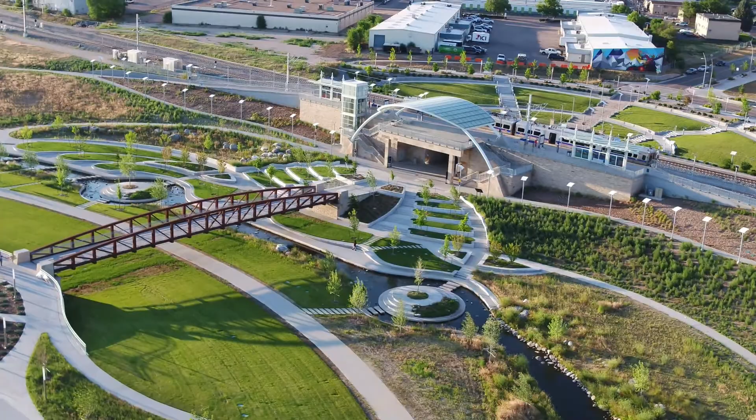Hi, I'm Dave Skuodas, Watershed Manager at the Mile High Flood District. I'm going to talk about a system of open channels we built back in 2016 in the boundary area between Louisville and Lafayette. Here are some photos, courtesy of Dave Krickbaum and Olsson, of this lovely area. There were some lessons learned on this project that I will be sharing with you today.

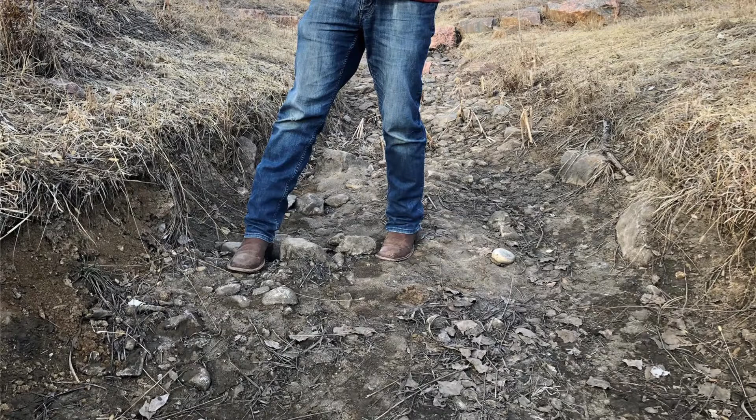There will be two fairly distinct halves to this presentation. In the first half, I'm going to talk about some stream instability we've experienced since the project was built. I'll explain what went wrong with some parts of the channel and why we think that is.

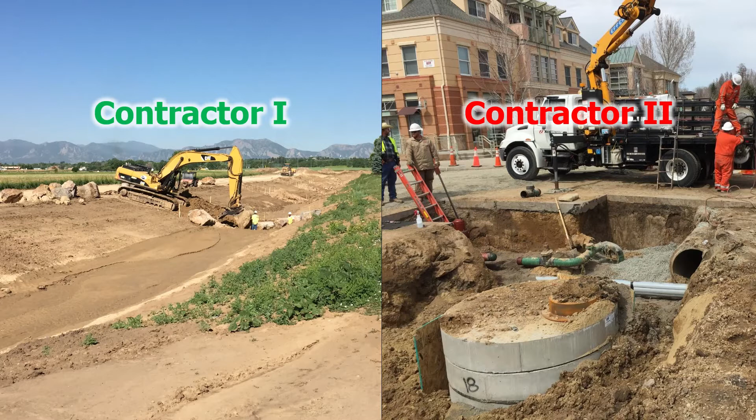In the second half of the presentation, I'm going to share some hard lessons we learned during the unique contractor experience we had. We built the project in two phases with two different contractors, giving us the unique opportunity to compare two low-bid contractors side by side on the same project simultaneously. We documented that experience like an academic exercise, and I'll share that story later on.

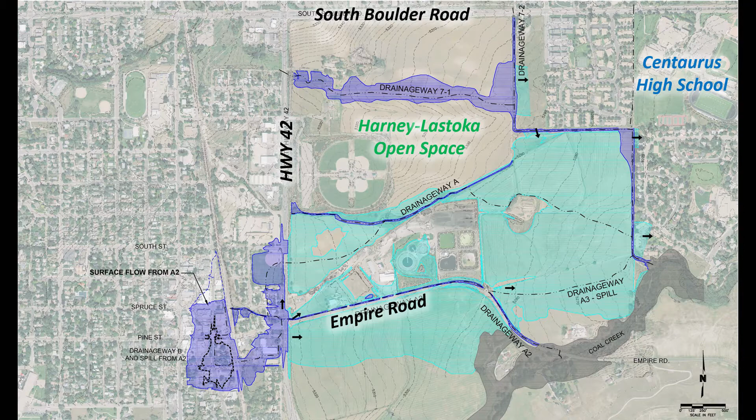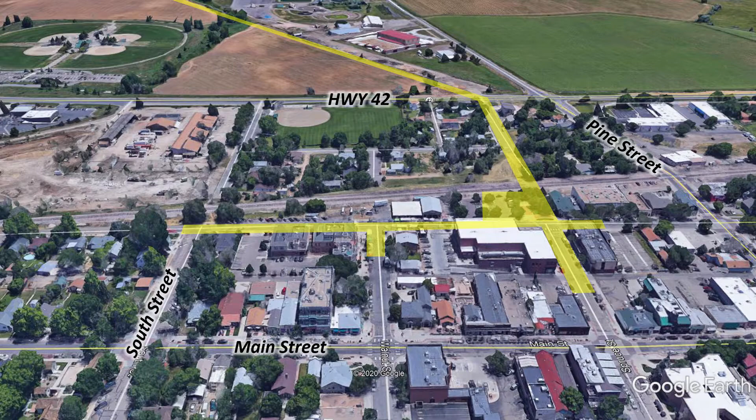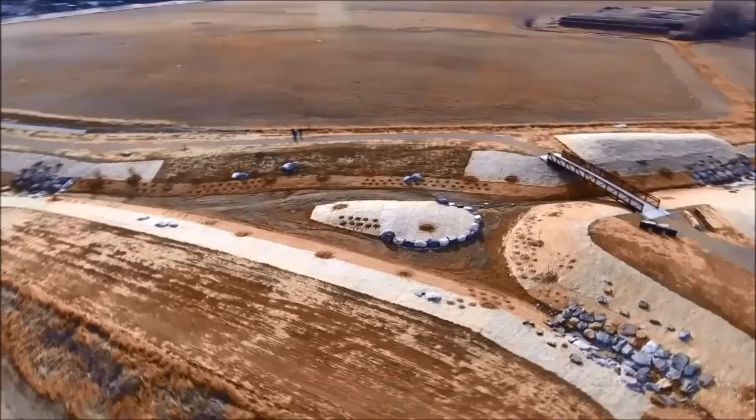The primary goal of the project was to reduce flood risk to downtown Louisville, to take the flood risk from this down to this. We had to tear into all of the city streets highlighted in yellow in order to build a 100-year storm drain system to capture stormwater and get it to the open space on the other side of Highway 42. And then we either built or enlarged the open channels through the open space to convey water around 1 mile downstream to Coal Creek. Some of you may remember this project from the CASFM Grand Award presentations back in 2017.

These channels pass through open space that's jointly owned by Louisville, Lafayette, and Boulder County. As we presented this project to the various open space advisory boards, a common concern we heard was, are you going to build concrete lined channels through our open space? For a lot of these folks, when they heard an engineer talking about drainage, that's the first thing they thought of.

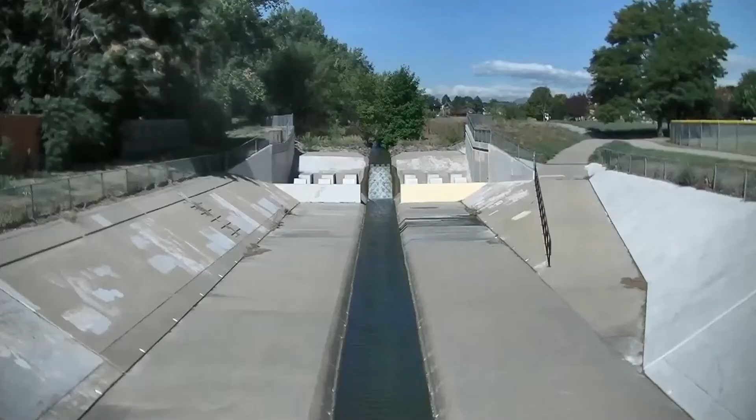I don't know where they would ever get the idea that I would like concrete lined channels. No idea why they would think that. For those of you that haven't seen me present before, yes, that was me in that video, and yes, it was a joke. Okay.

And while flood conveyance may have historically used a lot of concrete, at the district we have firmly transitioned to design approaches that mimic natural stream processes as much as possible. When we have enough space, we can construct open channels that can withstand flooding and erosion without expensive structural features made of rock and concrete. In short, we try to create infrastructure that looks like nature.

But the context matters. We're in an urban area after all, so flood conveyance is always going to be first and foremost on our list of goals. So the less space we have, the harder it will be to make drainage infrastructure look like nature. There is still a time and a place for sticking pipes in the ground, hopefully only in messy urban retrofit situations like in downtown Louisville on this project.

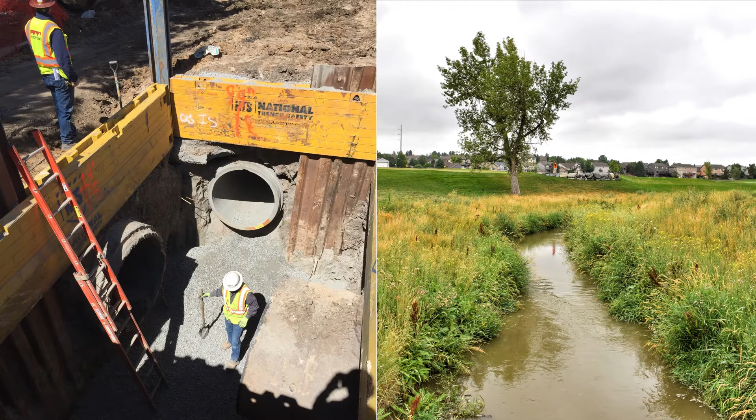But if that's one end of the spectrum, then a fully naturalized design is on the other end of the spectrum, and there are situations in between these two extremes. When you hear district staff talk about high functioning and low maintenance streams, we really mean highest functioning and lowest maintenance achievable given the context.

When we're dealing with greenfield land developments, we insist on wide enough corridors because the width helps us minimize rock and concrete, and makes using vegetation for stability possible. When we're in retrofit situations like this one, we start getting into unavoidable trade-offs. On this project, one of our major constraints was property. Even though this may appear to be an expansive open space, it didn't mean that we had access to all of that land for drainage purposes.

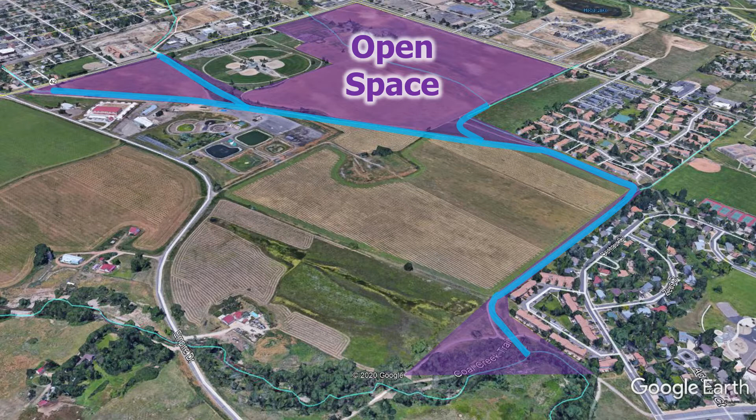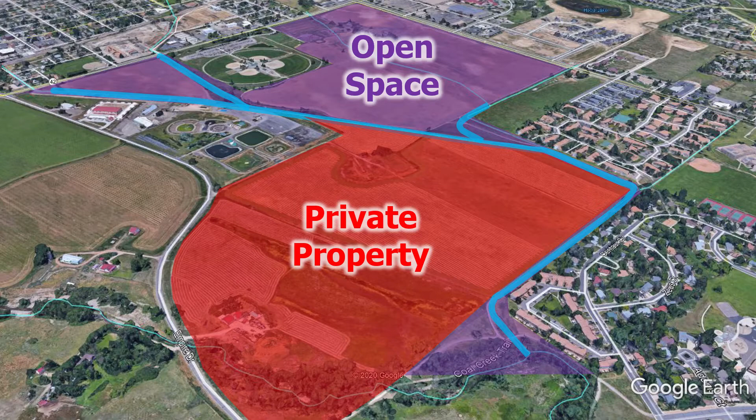In order to widen these channels, we had to repurpose open space being used for agriculture and purchase property from an adjacent private landowner who was at times openly hostile to the local governments and to the project. That meant we were forced to make these open channels narrow. Here's a before and after view showing the pre-project channel at the lower end, and how much we were able to widen it. Keep in mind, all of that additional land was private property we had to purchase from the hostile property owner.

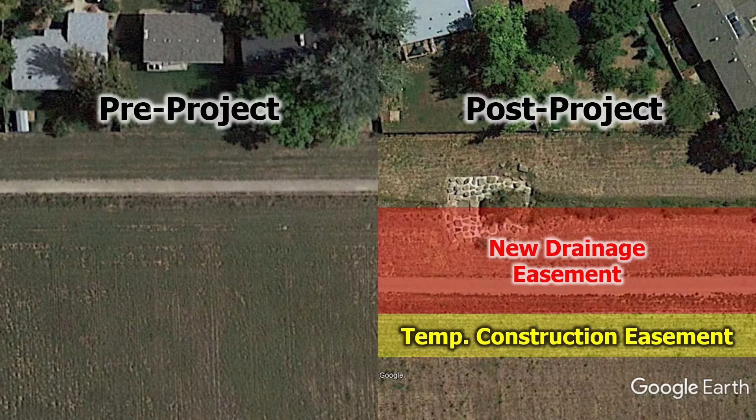Here are a couple of our typical cross sections from the project. We were able to get some benches in here and there, but by and large, this was a series of trapezoidal channels with a perfectly straight planform. Of all the options available to us, it was the best.

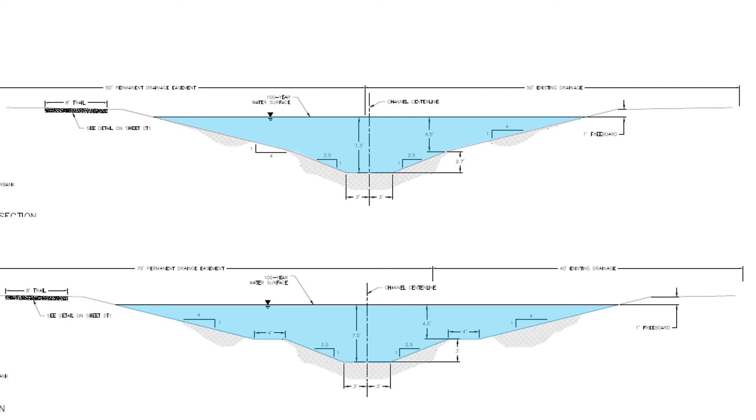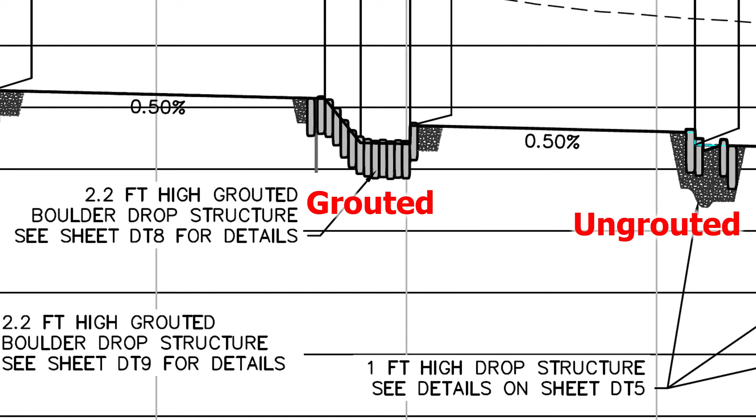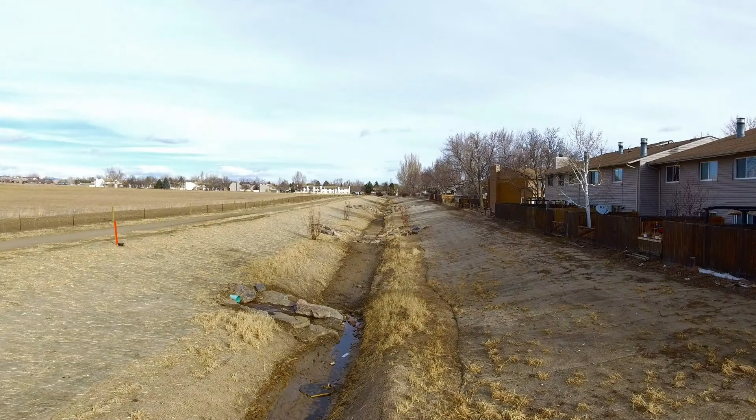So we did what we could to naturalize the stream corridors, and this meant smaller drop structures, minimizing grout, even using some ungrouted drop structures, all in an attempt to rely on vegetation for stability more so than rock and grout. Here are some photos of the site immediately post-construction where you can see some of our seeding and blanket efforts. This well-intentioned effort to naturalize confined trapezoidal channels is where we ran into some issues that have cropped up post-construction.

During the design, the engineering team gave me options with various levels of risk. One of the options they offered used steeper slopes, which meant less drop structures and less cost. But stability would require mature vegetation. Now, when we say steep, we're talking 0.5%, so really not that steep, but given the soil conditions, the engineers were concerned with instability during vegetation establishment. Well, as the project manager, I chose to take on that risk.

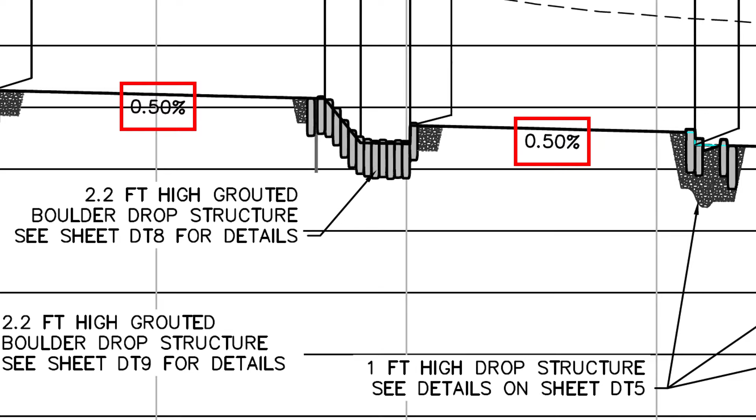Experience is invaluable to being good at my job, but it can also get in the way if I mistakenly assume this site is like most of the other sites I've worked on, when in fact, it may not be. The most unique way this site is different than most others I work on is that it just doesn't have that much water. It has way less water than I'm used to working with, particularly as it relates to the daily flows.

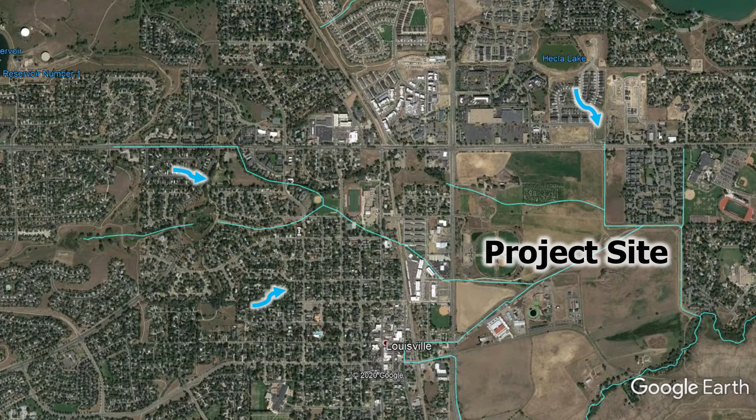The watersheds upstream of these channels have been built out for quite some time, and it has a lot of residential area that of course irrigates, but then the channels flow over a mile through pervious open space that contributes almost no runoff. And the watersheds aren't really that big. We're talking hundreds of CFS, not thousands. And then by the time you get to the lower end of the system, almost all of the daily flows have been soaked up.

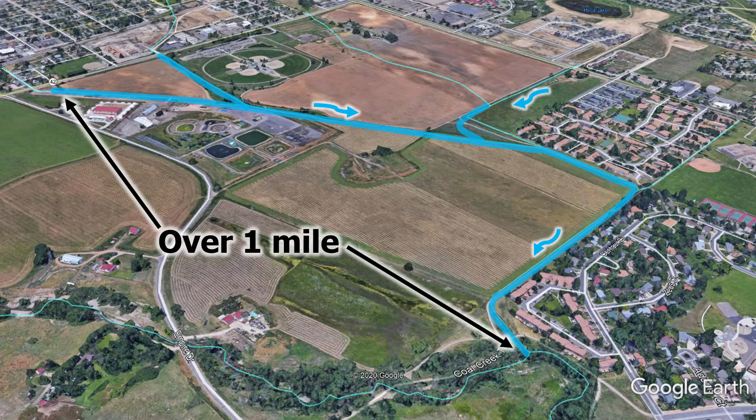Here is a pre-construction photo near Highway 42. With all of that vegetation, and willows in particular, there's clearly a fair amount of water, but not so much at the downstream end like this photo shows. By this point in the system, all of those daily flows have been soaked up. Here's what this same location looked like when there was more moisture, but certainly still no wetlands to speak of. The existing channels weren't even considered jurisdictional by the Corps of Engineers.

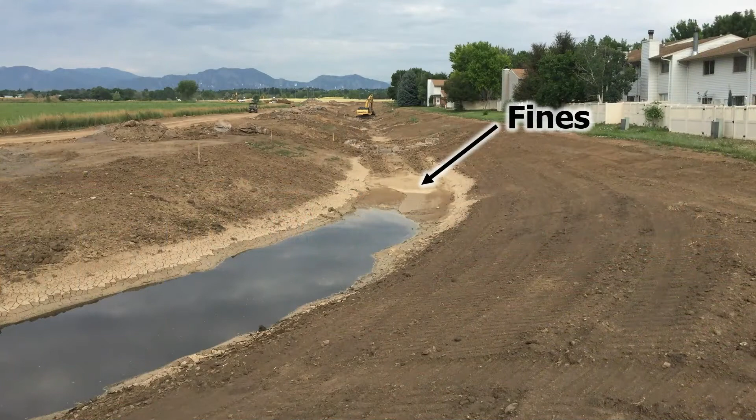So that's a quick nugget I want you all to take away from this presentation. If there's so little moisture that the Corps doesn't even consider the stream to be jurisdictional, that should be a cue as to how much flow you can expect to have helping you establish vegetation. The soils are also quite fine. Here is a photo showing some of the on-site material we had to work with. That means the material will have a higher propensity to erode, particularly when there is a lack of vegetation.

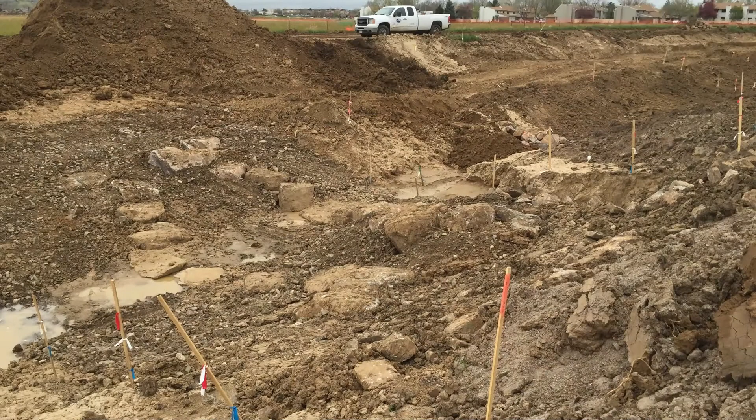So just to recap, at my direction, we built steeper channels with some ungrouted drop structures in a confined system with very little water and fine soils. You can probably guess where this is headed. We started off looking really good. Here's a photo immediately post-construction. You can see our nice blanket work, the shrub plantings, channel bottom looking really stable. Here is one of our ungrouted structures during construction, and then right after final BMPs were installed.

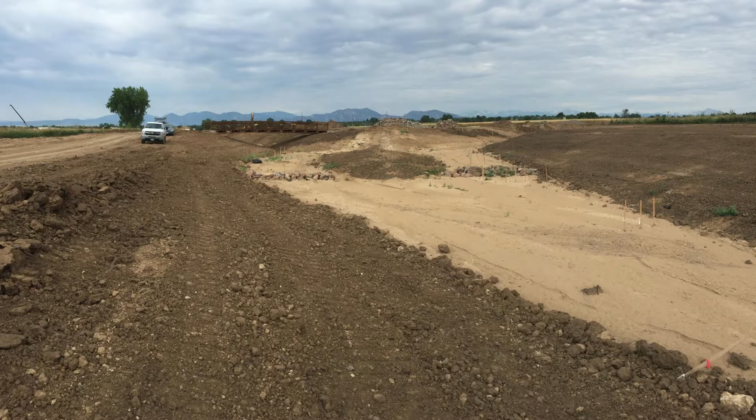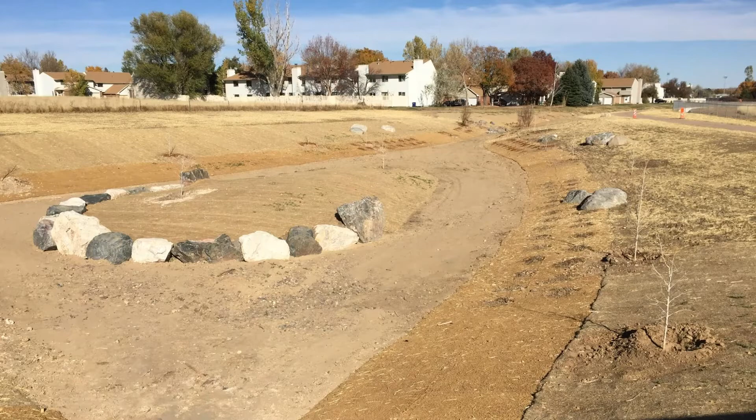Looking good. Here is where we had a couple of channels coming together at a confluence. You can see how fine the channel bottom material looks. Looks like pure sand in this photo. And then here are a few photos after the BMPs were installed and we got some growth. But then looking the other direction at this same location, we'll start to see some of the issues that have popped up. Again, looking good at first, but then notice in this next photo how the bottom of the boulders have become exposed. Here's another view of the same boulders.

And that's the district's Mark Schutte in the background. I caught him mid-joke as he was pointing out that the boulders look like teeth with a case of gingivitis. I was bummed that I didn't think of that joke because my wife works in dental.

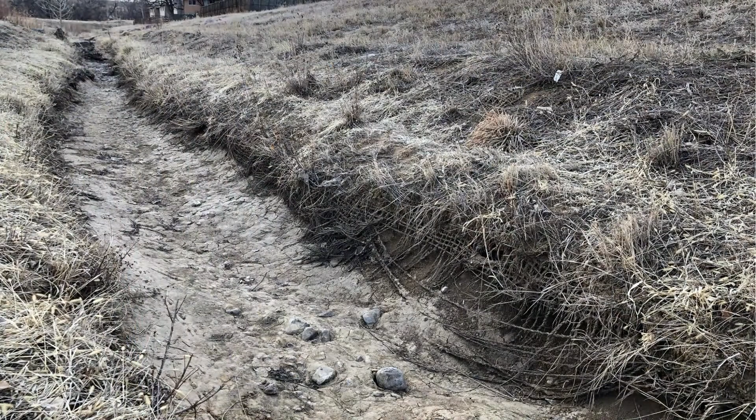As we look downstream at some of our channel sections, you can see what happened to some of that fine material further down the system.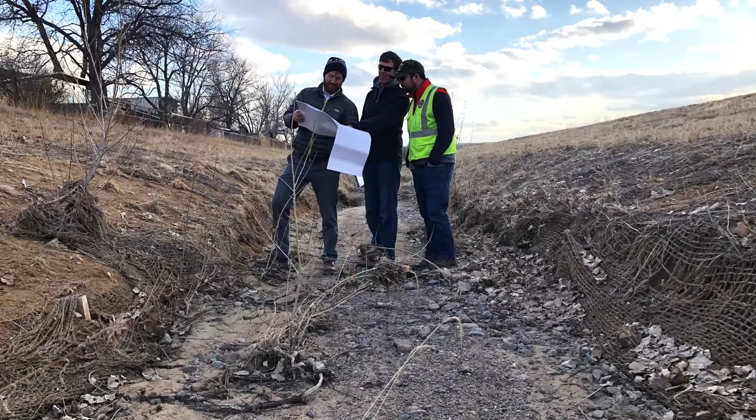Jim Watt is around 6'4", so that's a good 1 to 2 feet of incision we're looking at. And here he is with Jason Stowski and Mark trying to figure out what the heck went wrong. You can see some of the toe anchors for the blanket exposed here.

And then at one of our downstream ungrouted drop structures, the vegetation never grew in to help lock the structure together, and a bunch of material moved on us. This structure may also be a good example of how important it is to make sure material gets chinked into gaps, especially when we're setting boulders into a void-filled riprap mix. We think some of the installation challenges with the chinking could have contributed to rock moving on us. Like maybe we didn't get that locked-in dense rock matrix we like to see.

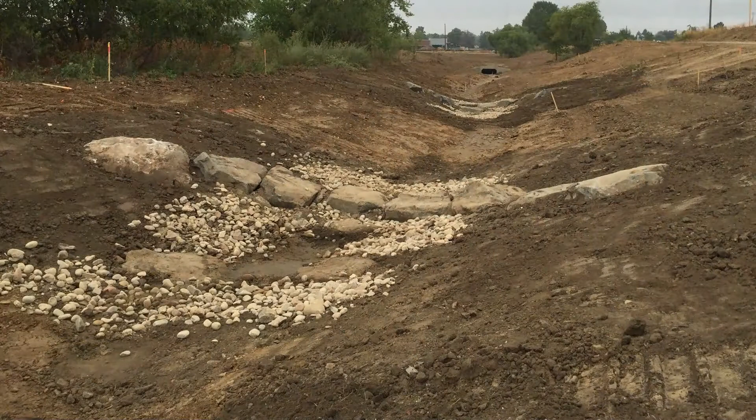Here is another one of our ungrouted structures, and then here's a photo of the same one taken on the same day we were seeing the eroded drop structure downstream a second ago. This is where we have a lot more daily water up near Highway 42, and this structure seemed to be quite stable. The vegetation grew in and was helping us.

When we rely on vegetation for stability, don't take it for granted that we need water to make that possible, the daily water. So we get this frustrating dichotomy that there's more daily water at the upstream end, but more flood water at the downstream end where the contributing watershed is much bigger.

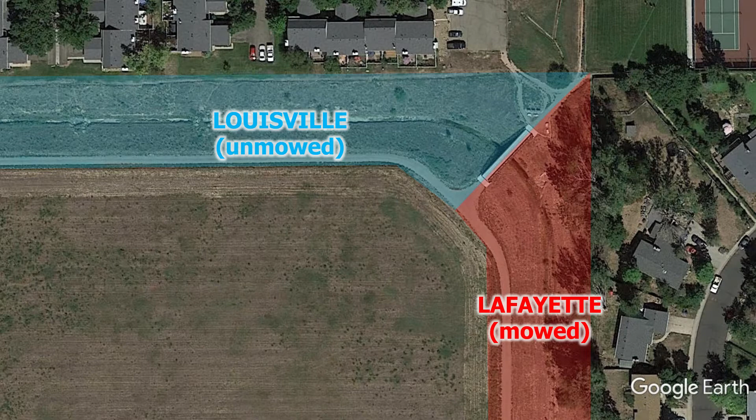This photo taken at the same time looks south at the Lafayette channel. I can't recreate the history on this, but somehow we ended up adding the channel in Lafayette to our routine mowing schedule, but didn't add the channel in Louisville to the mowing schedule. As we fast forward in time a couple of years, you can see a stark difference in how healthy the vegetation is in the unmowed channel in Louisville versus the mowed channel in Lafayette.

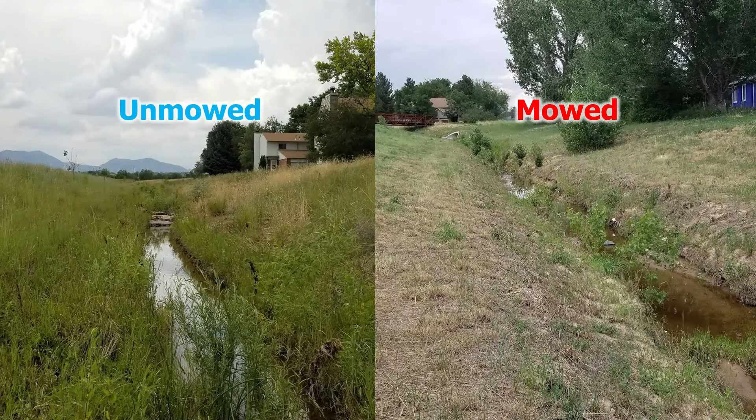And then here is a ground level view of the Louisville unmowed channel, and then on the same day, here is the Lafayette mowed channel. The district has moved away from mowing native areas, and this is a good example of why. This obviously impacted vegetation establishment and surely contributed to the instability we've seen.

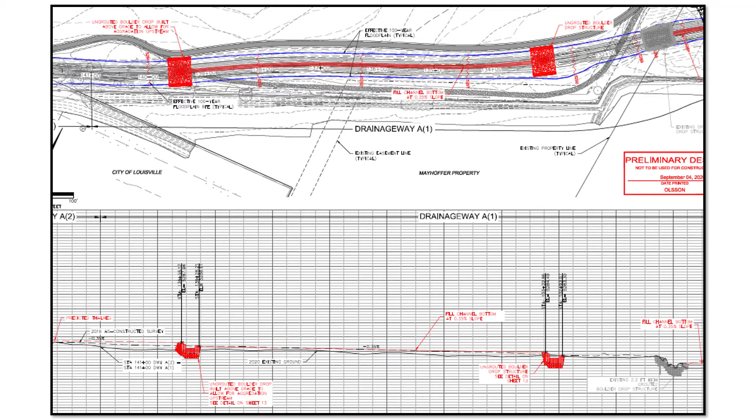So what are we going to do here? Well, we're in design for the repairs right now, but it's looking like we need to flatten some of the slopes by installing another grade control structure or two. And we're going to have to repair a few structures that are falling apart, either by converting them to grouted structures or by resetting the rock to get it chinked in better, with perhaps some temporary watering of the vegetation at the repair.

In looking at the ungrouted boulder structure, we also think this could function better and retain the smaller rock if we line the boulders up slightly differently. You can see the boulders were set next to each other, but leaving some small gaps in the face between the boulders in the downstream direction could lead to more material getting washed through. We think we'd be better off to have the boulders touch each other, overlap a bit in the downstream direction. This should anchor them to each other better and prevent material from being washed through the gaps between the boulders.

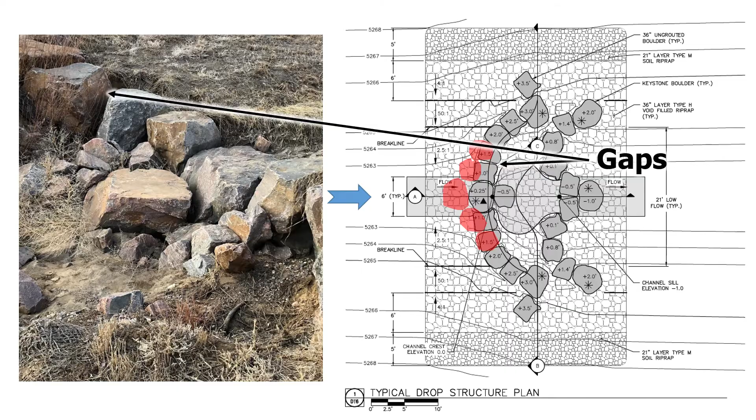So the basic takeaways from this portion of my presentation are as follows. When we talk about high functioning and low maintenance, we really mean highest functioning and lowest maintenance that's achievable given the context. When you don't have the water, be realistic about the extent to which you can rely on vegetation for stability, especially for that establishment period. Vegetation is preferred over rock and concrete, but be realistic about it.

On this project, the confined corridor, the lack of water, the fine bed material, and the channel slope all contributed to the incision that formed post-construction. The next site you work on will be different than this one, but I hope by seeing this example, it will equip you with good questions to ask so you can avoid some of the repairs we've had to make.

Now, I'd like to talk about that contractor experience I mentioned earlier. Many of you watching this presentation are familiar with the district's project partners procurement process. For those that are not familiar, we use a relationship-based project delivery process that relies on multidisciplined design and construction teams with high levels of trust. It most closely resembles a CMGC contract.

We do similar work year after year, and we find great value in the long-term relationships we've formed with our design and construction professionals. So our process does not involve open, low-bid contracting. Basing your contractor selection only on the lowest initial bid basically implies that all contractors are interchangeable, and the only distinguishing feature we care about is their initial bid. I say initial because you never know how much a project really costs until it's done.

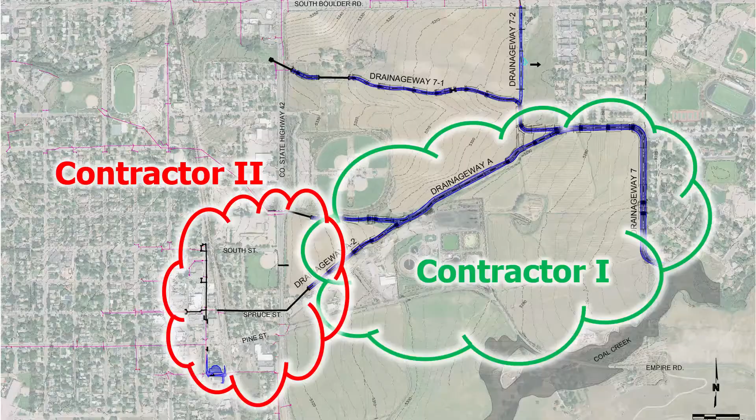And let me tell you, we had very different experiences with these two. Put more bluntly, Contractor 1 was great. They're one of the district's on-call contractors. Number 2 was horrible. We had issues galore: personnel, quality, safety, schedule, everything. The contrast was stark enough that we decided to quantify the differences in any way we could think of. Mark Schutte, who's now at the district, was the consultant in the field helping us with construction. Mark wrote a short but well-written report to document our findings. So here are a few highlights of the quantifiable comparisons between the two contractors.

We had a lot of public complaints. Number 2 got ahead of themselves and tore up a road east of downtown, the road in that picture. It was only supposed to be closed for a month, but this stretched to 4 months as they diverted crews back to downtown to meet the farmers market deadline. People couldn't access their driveways. They had to walk a few blocks to get to their cars. They were ticked. And then Number 2's workers were caught a few times helping themselves to garden hoses from people's homes when they needed water. These complaints got directed to the ownership team.

We had safety issues with Number 2. Most of these had to do with their open-cut crossing of Highway 42, which you can see in the foreground of that photo.

They did such a poor job with their road patching that it had to be repaved a few times, and some drivers were in danger of breaking an axle, including the city's inspector who would pass by each day on his way to work. There were numerous quality issues, and a lot of it was the easy stuff.

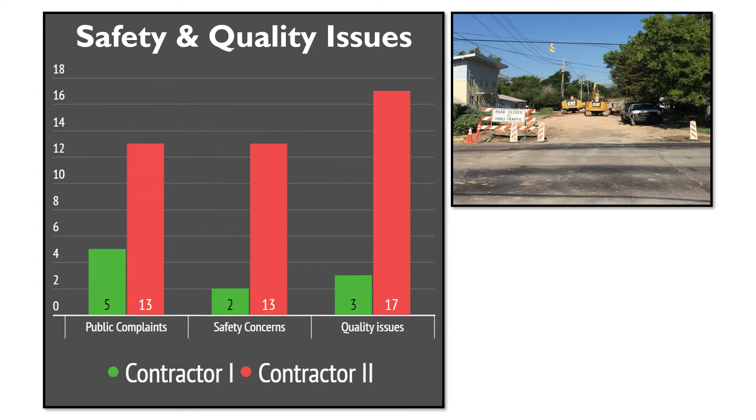A few quick examples. On the waterline work, we had lots of megalug fittings. These come with those blue bolts that shear off when you've torqued them enough. Well, all over the place, you'd see these megalug bolts still there when they were ready to bury the thing.

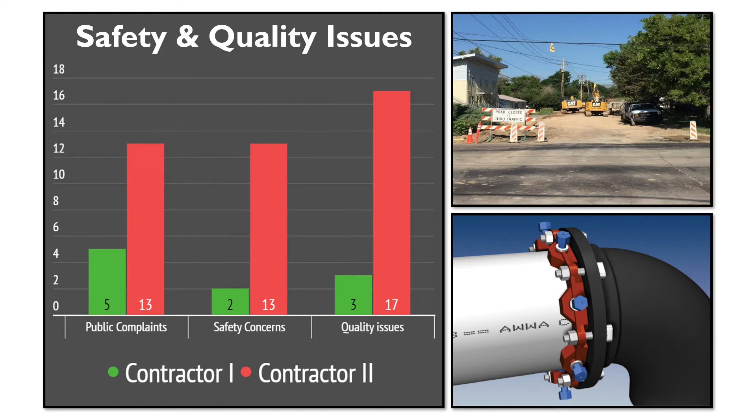With water services, they were supposed to use gate valves, and they buried them before the inspector could look at them. They said, "Oh yeah, we used the right valves." The inspector made them dig them up anyway, and sure enough, they used ball valves instead of gate valves.

There were lots of change order requests. Number 2 had 3 times the number of requests than contractor Number 1. Number 2 had a serious lack of professionalism. They would just bombard Mark with poorly organized paperwork and make him figure it out. So that was a lot of field orders and RFIs, lots of iterations on submittal reviews.

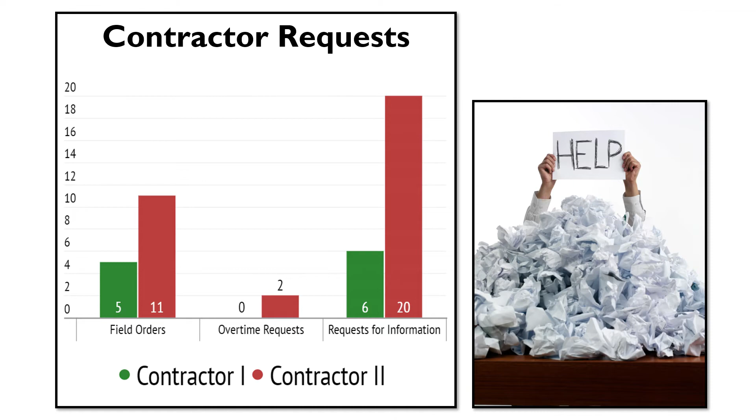The 2 overtime requests from Number 2 were for weekend work they needed to meet the farmers market deadline. The deadline was May 27th. They had it ready no sooner than the end of day on May 27th. So yeah, they were paving the road on the last day possible.

When it came to pay applications, we couldn't trust any of the quantities Number 2 would submit. Poor Mark earned an honorary CPA keeping track of them. He developed a strong bond with his survey wheel, painstakingly checking quantities each month.

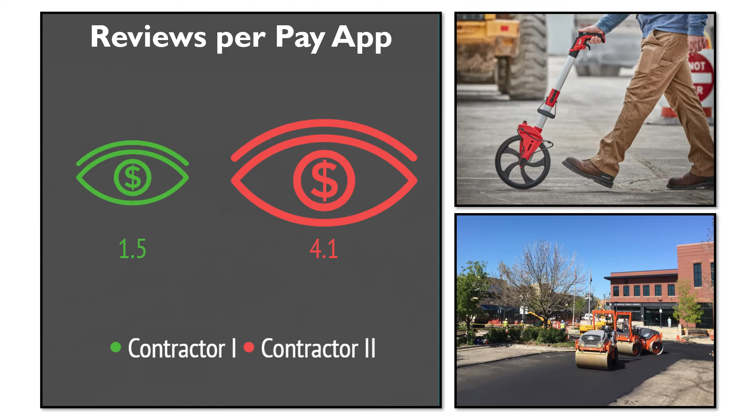And then at one point, Number 2 claimed 20 to 30% extra quantity on the asphalt, which of course they didn't bring up before or during the paving, but a few weeks later. Their approach was to toss us a bunch of stuff and then we had to do the work to disprove it. So Number 2 generated over double the number of emails per day than Number 1, and of course this all leads to more money we had to pay for Mark's time.

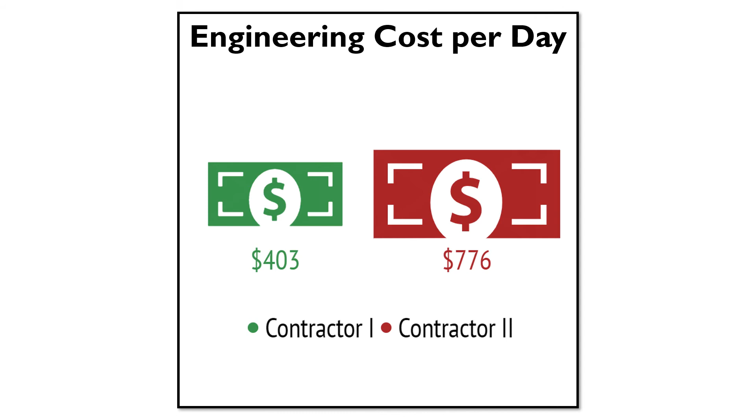There were other projects in the area that were waiting on Number 2's work. Number 2 took so long in getting things done, we eventually deducted over $450,000 worth of work from their contract and awarded it to adjacent contractors who we trusted.

When it came to releasing retainage, this got held up by claims from subcontractors. We held the retainage until we had proof that the subs had been paid. And here's an email from one of the subs Number 2 needed a release from. I'll give you a dramatic reading of this.

Here's the form you were needing to get your money from the city. We were just needing to make sure blank didn't screw us out of any other money like the concrete work we did for you guys at the Louisville job. Pretty funny how all of a sudden your phone and email works when you want to check. That feeling sucks, doesn't it, when you cannot get an answer from anyone and you're trying to get paid? Hopefully you won't screw over any other subcontractors again. Have a good day.

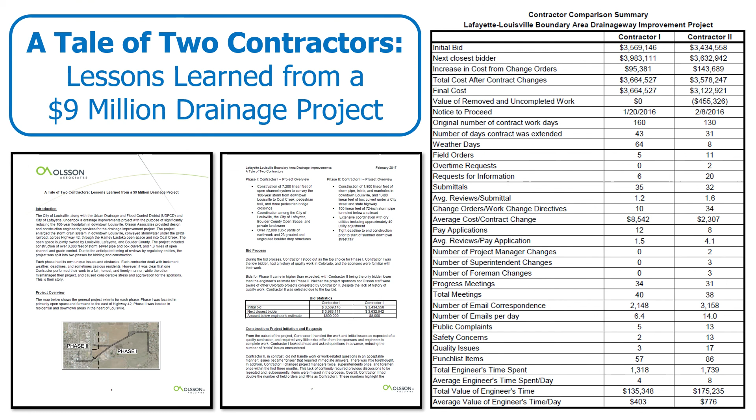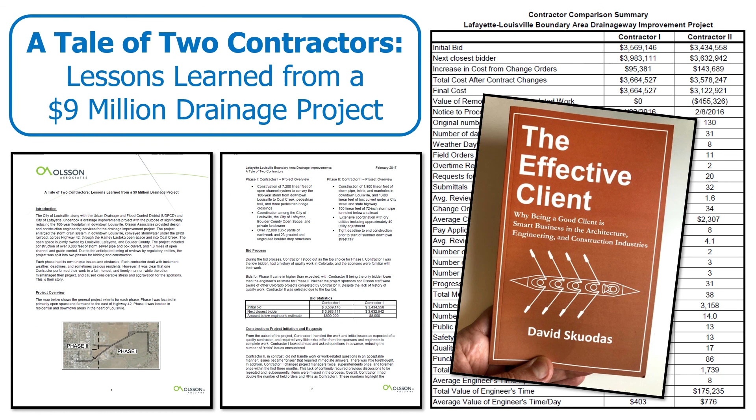This was by and large a very successful project. We accomplished what we set out to do. But as with most projects of this size, it wasn't perfect, and I hope the lessons we learned will be useful to you on one of your future projects.